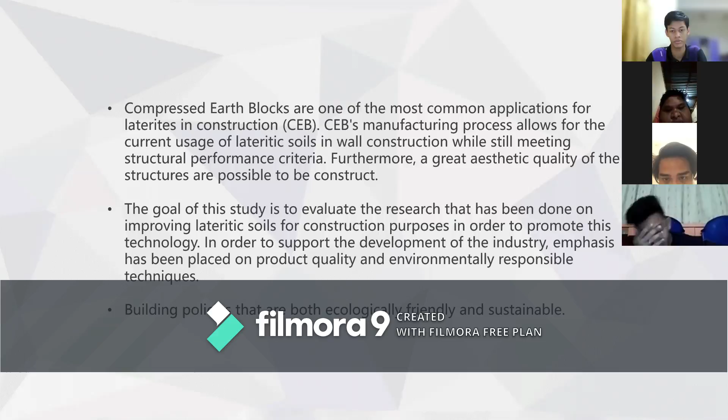So for the methodology for laterite base, first we have mechanical stabilization. The method of compacting the soil to change its resistance, compressibility, permeability, and porosity is known as mechanical stabilization. The soil is mechanically processed to remove as much air as possible, resulting in an increase in density.

Next, number two, we have physical stabilization. Physical stabilization entails altering the qualities of soil by adjusting its texture, granulometry treatment, dehydration or freezing, or electroosmosis treatment that causes the soil to drain and confers new structural properties.

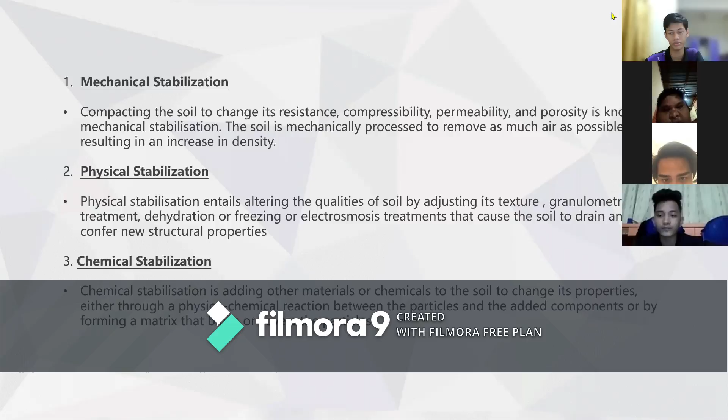Third, we have chemical stabilization. Chemical stabilization is adding other materials or chemicals to the soil to change its properties, either through a physicochemical reaction between the particles and the added components or by forming a matrix that binds or covers the particles.

Okay, for lime stabilization, Ca2+ is partly adsorbed on the surfaces of clay particles when lime is introduced into soil for stability, replacing monovalent cations such as Na and K. The amount of Ca2+ that has been adsorbed depends on the treated soil's cation exchange capacity. The lime fixation point is the amount of lime required to satisfy the soil's affinity for lime.

For cement stabilization, the hydration of the two anhydrous calcium silicates, the principal ingredient of cements, results in the formation of two new compounds, which are calcium hydroxide and calcium silicate hydrate.

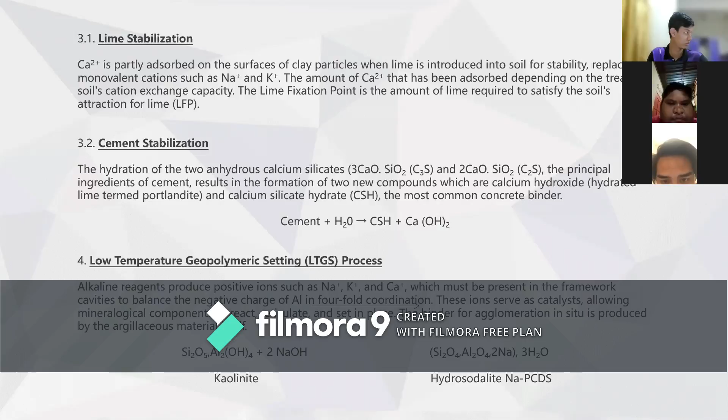Okay, for the fourth method, we have the low temperature geopolymeric setting process. Alkaline reagents produce positive ions such as Na, K, and Ca, which must be present in framework cavities to balance the negative charge of aluminum in 4-fold coordination. This ion serves as a catalyst, allowing mineralogical components to react, reticulate, and set in place. The binder for agglomeration in situ is produced by the argillaceous material itself.

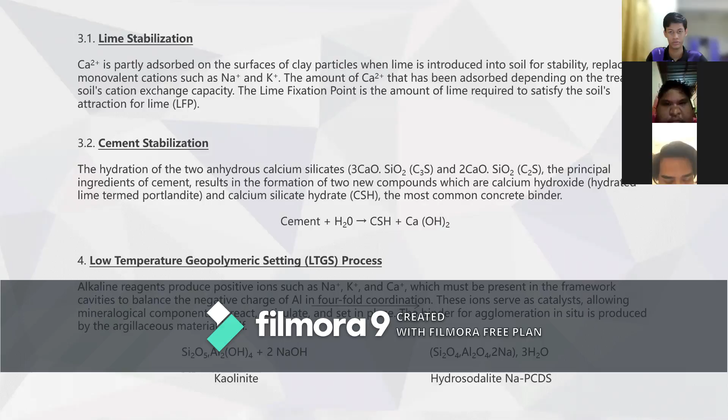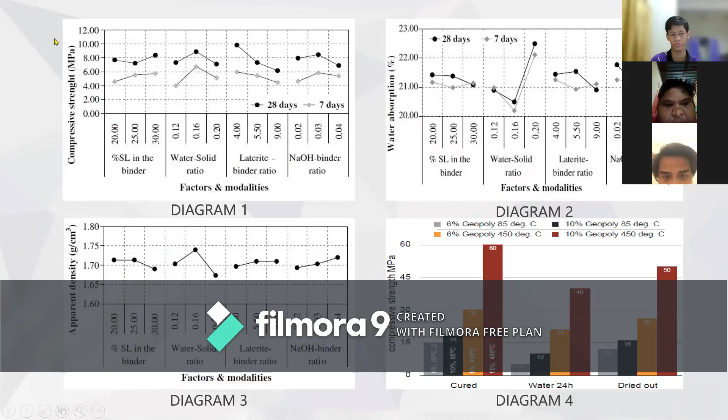Thank you, Alif. Okay. So next, for the result, there are 4 diagrams that show the result of this case study. The first is compressive strength versus factors and modalities. The second one is factors and modalities versus water absorption in percentage. Third is factors and modalities versus apparent density. And the last one is compressive strength, the difference between water cured and dry.

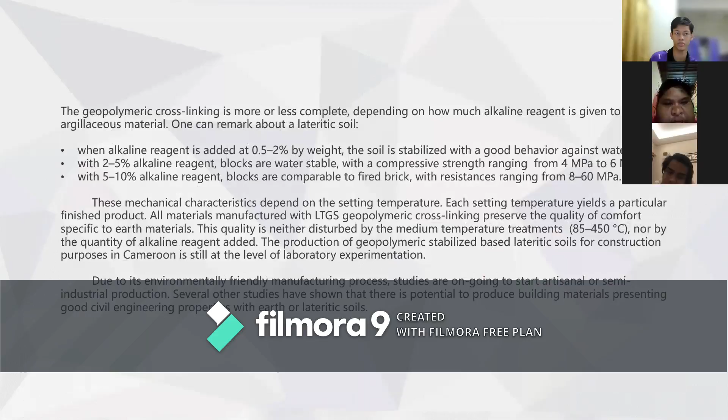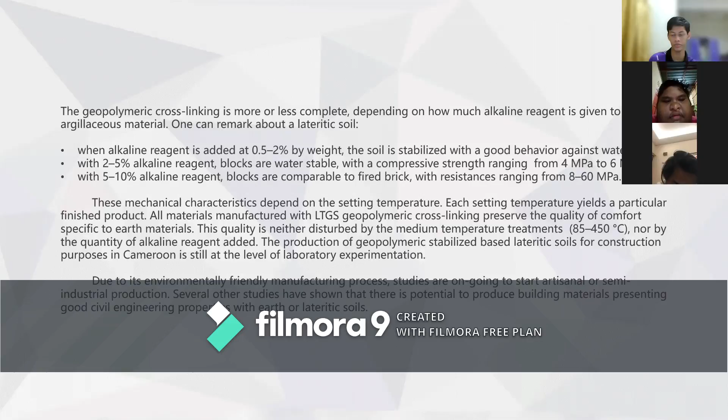So next, the geopolymeric cross-linking is more or less complete, depending on how much alkaline reagent is given to the argillaceous material. One can remark about a lateritic soil: when alkaline reagent is added at 0.5 to 2% by weight, the soil is stabilized with a good behavior against water. With 2 to 5% alkaline reagent, blocks are water stable with a compressive strength ranging from 4 MPa to 6 MPa. With 5 to 10% alkaline reagent, blocks are comparable to fired brick with a resistance ranging from 8 to 60 MPa.

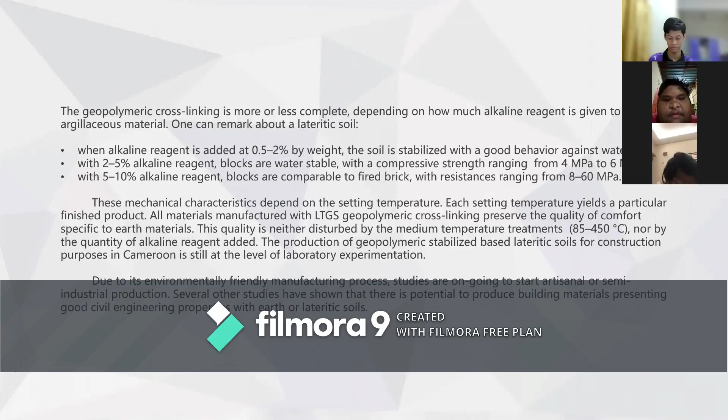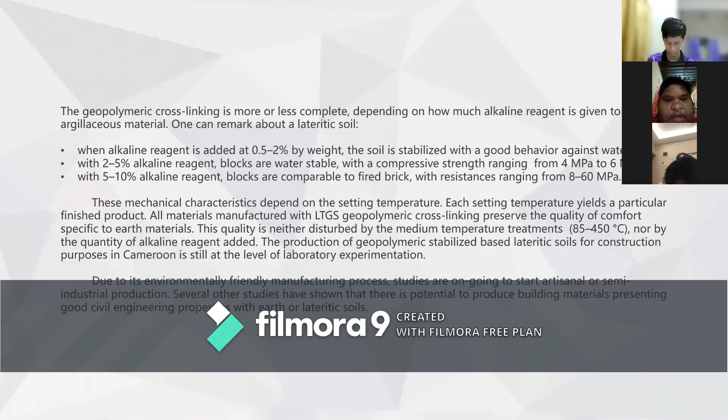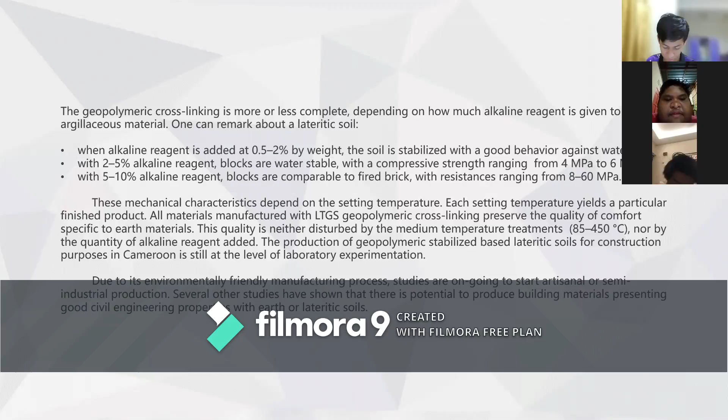These mechanical characteristics depend on the setting temperature. Each setting temperature gives a particular finished product. All materials manufactured with LTGS, geopolymeric cross-linking, preserve the quality of comfort specific to earth materials. This quality is neither disturbed by the medium temperature treatments, 85 to 450 degrees Celsius, nor by the quantities of alkaline reagent added. The production of geopolymeric stabilized lateritic soils for construction purposes in Cameroon is still at the level of laboratory experimentation. Due to its environmentally friendly manufacturing process, studies are ongoing to start artisanal or semi-industrial production.

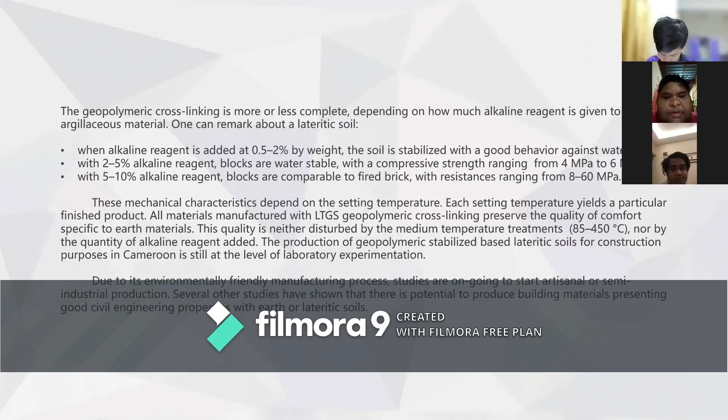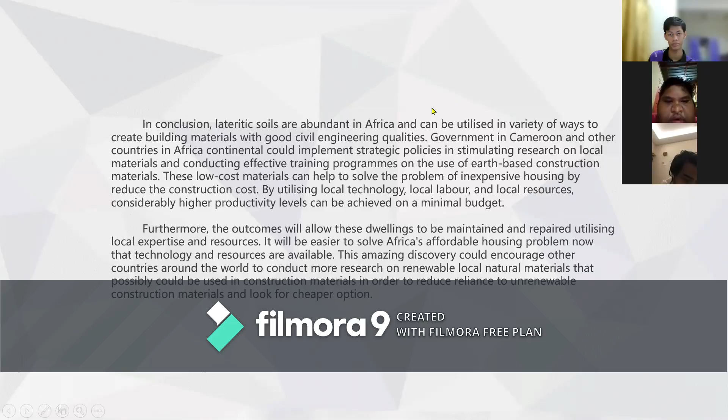Several other studies have shown that there is potential to produce building materials presenting good civil engineering properties with earth or lateritic soils. Next. In conclusion, lateritic soils are abundant in Africa and can be utilized in a variety of ways to create building materials with good civil engineering qualities. Governments in Cameroon and other countries on the African continent could implement strategic policies stimulating research on local materials and conducting effective training programs on the use of earth-based construction materials.

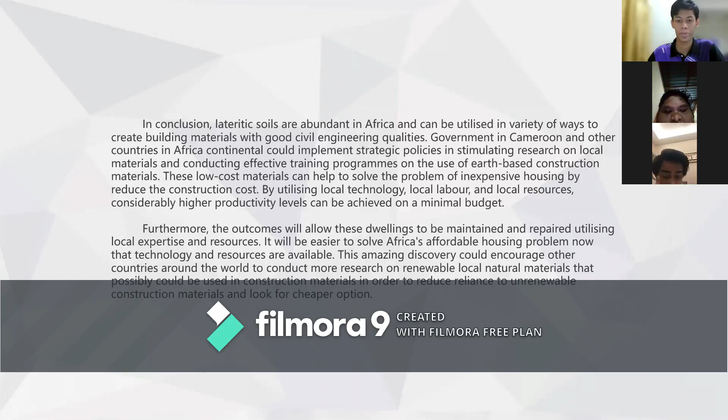These low-cost materials can help to solve the problem of inexpensive housing and reduce the construction cost. By utilizing local technology, local labor, and local resources, considerably higher productivity levels can be achieved on a minimum budget. Furthermore, the outcomes will allow these dwellings to be maintained and repaired utilizing local expertise and resources. It will be easier to solve Africa's affordable housing problem now that technology and resources are available.

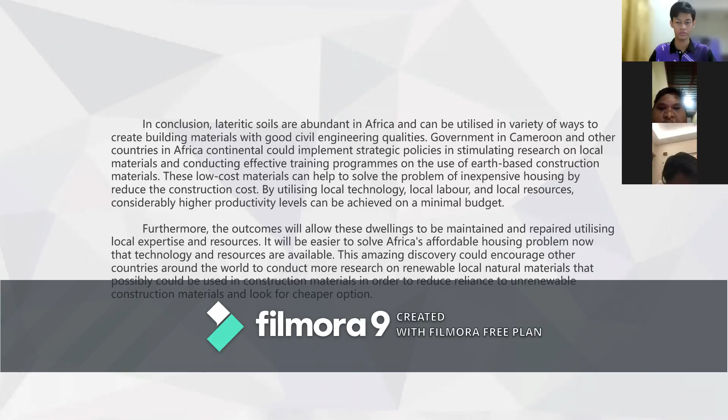This amazing discovery could encourage other countries around the world to conduct more research on renewable local natural materials that could possibly be used as construction materials in order to reduce the reliance on non-renewable construction materials and look for cheaper options. So thank you very much.

For the next slide, I will pass to Muhammad Hafiman. Thank you. All right, thank you, Muhammad Noadili.

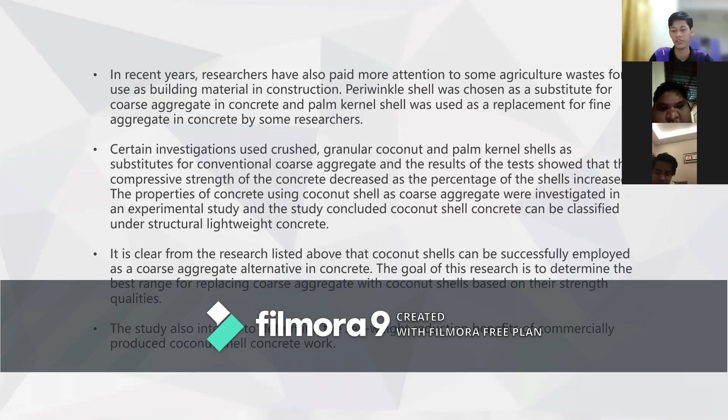It is clear from the research listed above that coconut shell can be successfully employed as a coarse aggregate alternative in concrete. The goal of this research is to determine the best range for replacing coarse aggregate with coconut shell based on their strength qualities. The study also intends to determine self-weight reduction, the benefit of commercially produced coconut shell concrete work.

The methodology used was the workability test. The ease with which concrete can be moved, poured into a mold, and compacted with appropriate surface finishing without segregation is defined as workability. The slump cone test was used to determine the workability of the various mixes, and the consistency of each mix was determined. Next is the compressive strength test. For each type, 3 cubes were cast, and their average compressive strength was used to determine the compressive strength value for each mix.

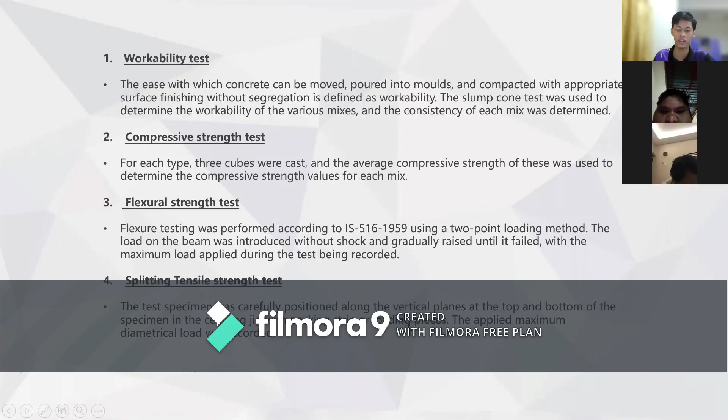Next is the flexural strength test. Flexural testing was performed according to IS 516-1959 using a 2-point loading method. The load on the beam was introduced without shock and gradually raised until it failed, with the maximum load applied during the test being recorded. Last but not least is the splitting tensile strength test. The test specimen was carefully positioned along the vertical plane at the top and bottom of the specimen in the centering jig with packing strips or loading pieces. The applied maximum diametrical load was recorded.

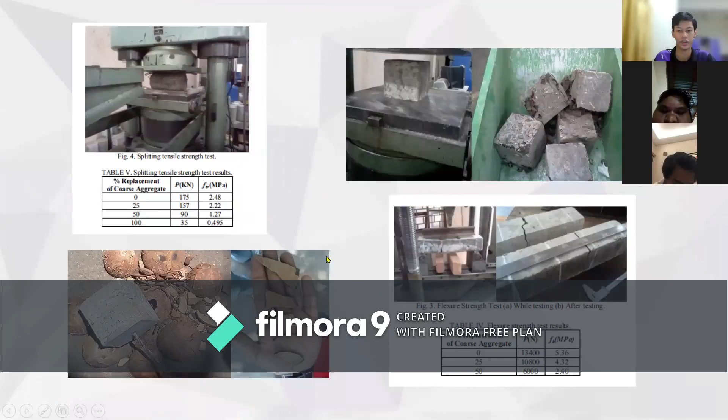The results and discussion. So this is the result for the splitting tensile strength test. The next one is the strength test results. All right, so this one is the result for the reduction in self-weight calculation. Table 2 here is the workability test result, as you can see. Table 1 is the type of strength test and specimen. Table 3 is the compressive strength test result, according to the percentage of replacement of aggregate.

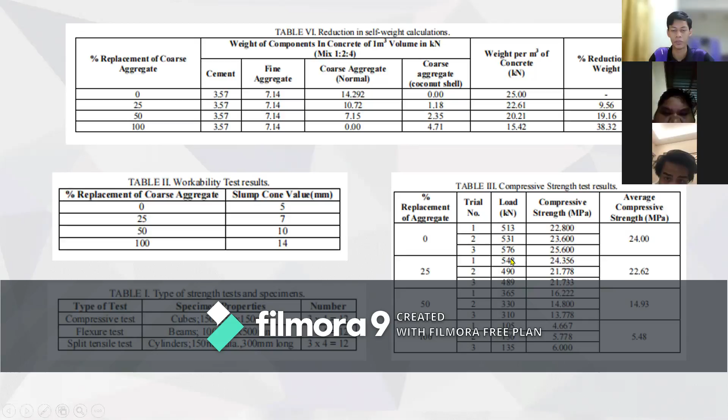Workability was observed to improve as the fraction of aggregate replaced with coconut shell increased. The smooth surface of one side of the shell, as well as the smaller size of coconut shell compared to traditional aggregate, gives coconut shell superior workability. The average compressive strength of the 25% replacement mix was 22.62 megapascal, nearly 94.25% of the strength of normal concrete. For 50% and 100% replacement, we achieved compressive strengths of 14.93 megapascal and 5.48 megapascal respectively.

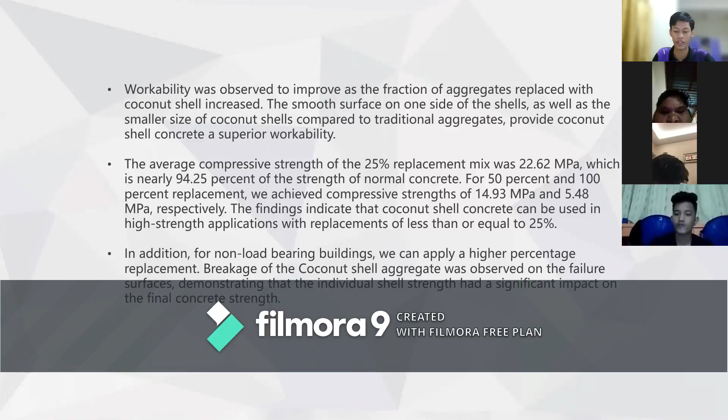The findings indicated that coconut shell concrete can be used in high strength applications with replacement of less than or equal to 25%. In addition, for non-load bearing buildings, we can apply a higher percentage of replacement. Breakage of the coconut shell aggregate was observed on the failure surface, demonstrating that the individual shell strength had a significant impact on the final concrete strength.

All right. Next, I pass to Anaki.

In conclusion, coconut shell is experimentally proven to be the right alternative choice to substitute coarse aggregate in concrete mixture materials. There is very low reduction in workability, with slump cone values between 5 to 15 mm and a compacting factor of 0.78. This better workability is believed to be due to the smooth surface on the exterior side of the shell and the size of coconut shell used during the experimental test.

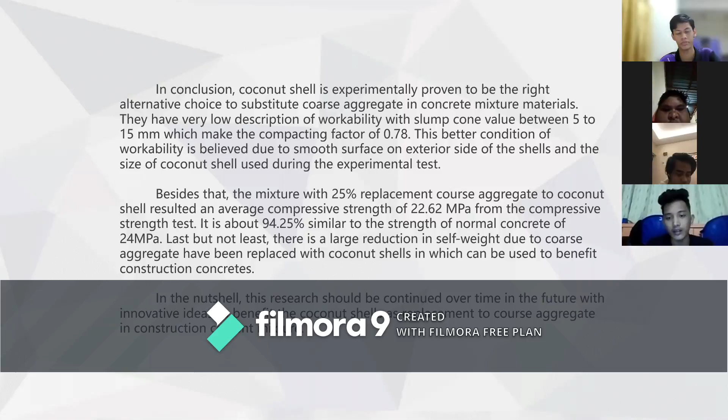Besides that, the mixture with 25% replacement of coarse aggregate with coconut shell resulted in an average compressive strength of 22.62 MPa from the compressive strength test. It is about 94.25% of the strength of normal concrete of 24 MPa. Last but not least, there is a large reduction in self-weight due to coarse aggregate being replaced with coconut shells, which can be used to benefit construction concretes. In a nutshell, this research should be continued in the future with innovative ideas to use coconut shells as a replacement for coarse aggregate in construction cement mixtures.

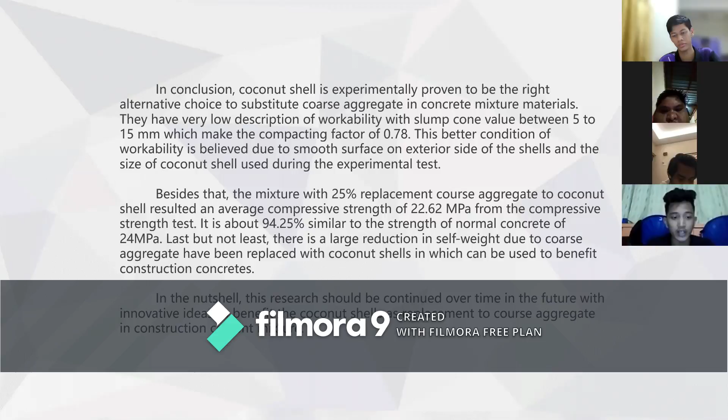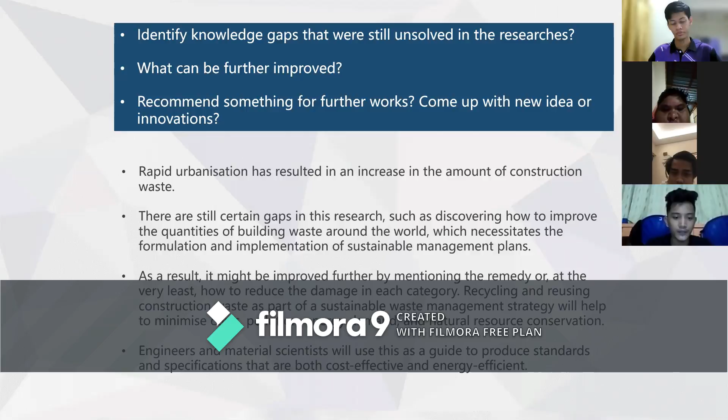Recycling and reusing construction waste as part of a sustainable waste management strategy will help to minimize cost, pollution, and energy demand, and support natural resource conservation. Engineers and material scientists will use this as a guide to produce standards and specifications that are both cost effective and energy efficient. Next.